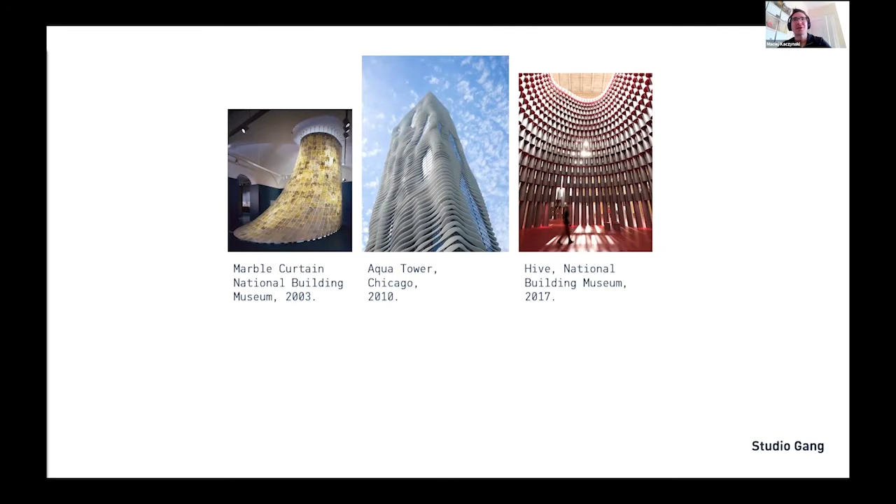Our research is a continuation of last year's ACAW. More about that in just a bit. So let me begin with a quick recap. So at Studio Gang, we work on architecture and design projects at many different scales, from prototypes to towers. And regardless of scale, a common link across these is an interest in material research and exploration. We're really keen in learning and understanding what things are made of, how materials work, how they break, how they perform, and so forth. Through material research and hands-on explorations, we hope to discover new and sometimes even forgotten ways to work with these materials.

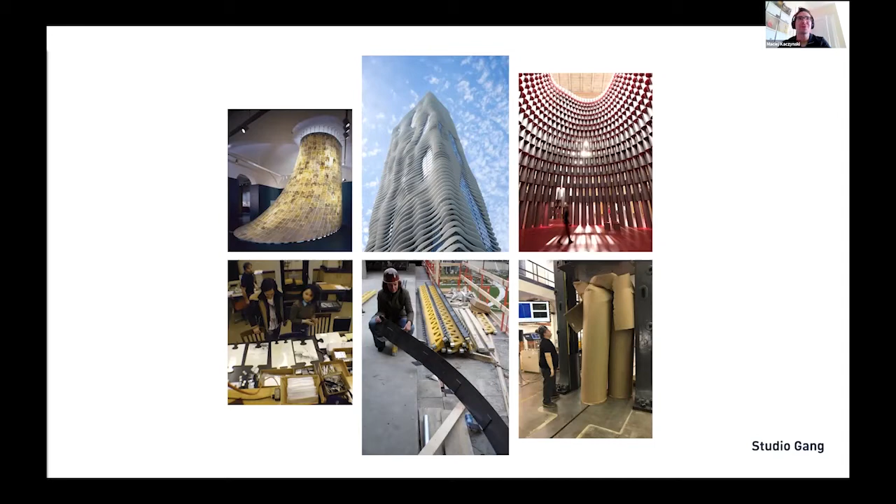Projects like ACAW are a wonderful opportunity to build relationships with and learn from material and fabrication experts. So of course, we're very thankful again to be here. We've had some experience working with terracotta as a facade material. We teamed up with Boston Valley on this project. This is Rescue Company 2, a training facility for FDNY. We were super thrilled with the collaboration and the result, but I will admit we were also astounded by the complexity and the sophistication of the clips and infrastructure hidden behind the facade necessary to hold the panels up.

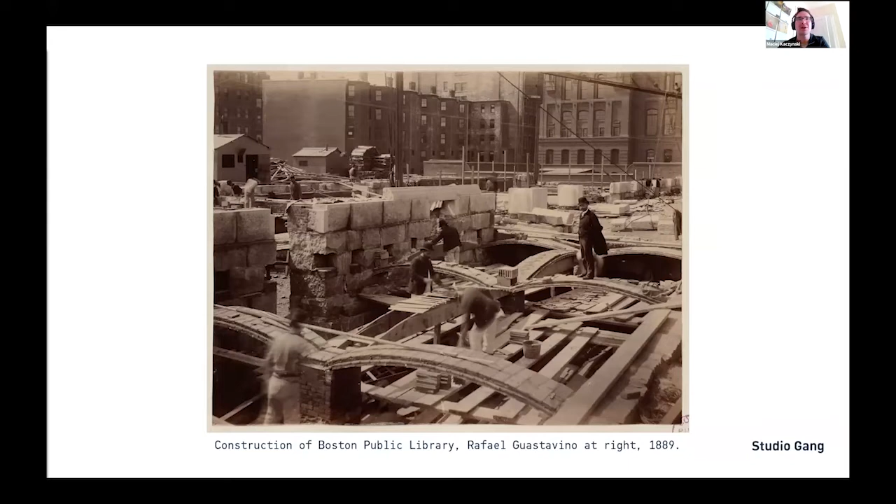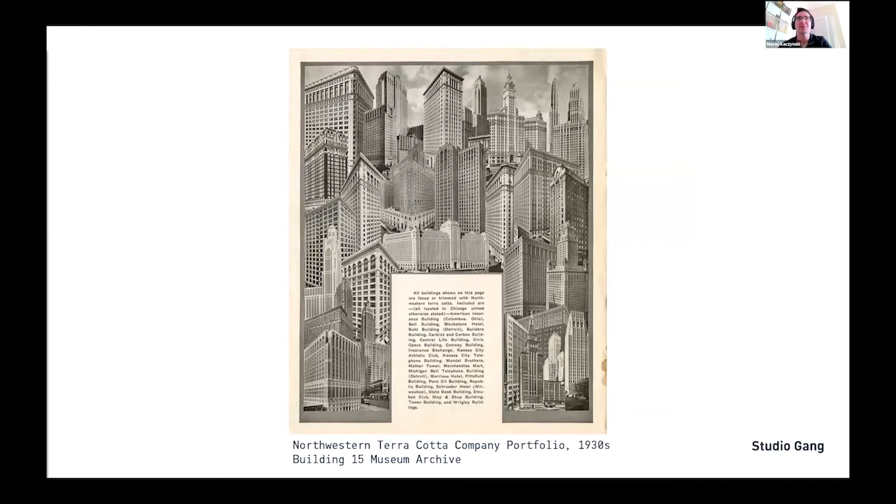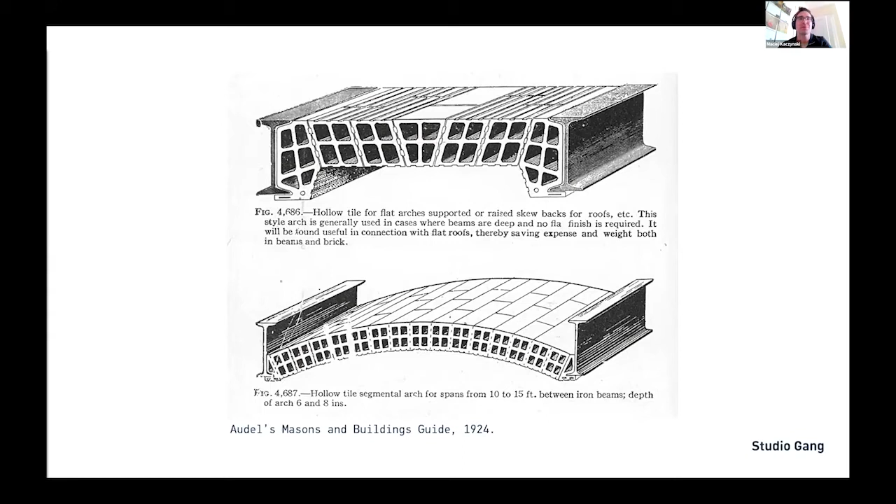ACAW presented us with the opportunity to get to know terracotta beyond the facade. And so we became really keen to learn what other applications we can find historically where terracotta has been used, in this case, structurally. We were super thrilled also to learn about the historical heyday of terracotta, and certainly Chicago played a big role in that, with a lot of civic buildings. But let's not forget that terracotta was not always, even in its heyday in the 1930s, a facade material. It did play a very important role in fireproofing and even permanent structural formwork. So this led us to our question, how can we scale up terracotta construction? And perhaps, as a side goal, how can we also reintroduce past structural applications?

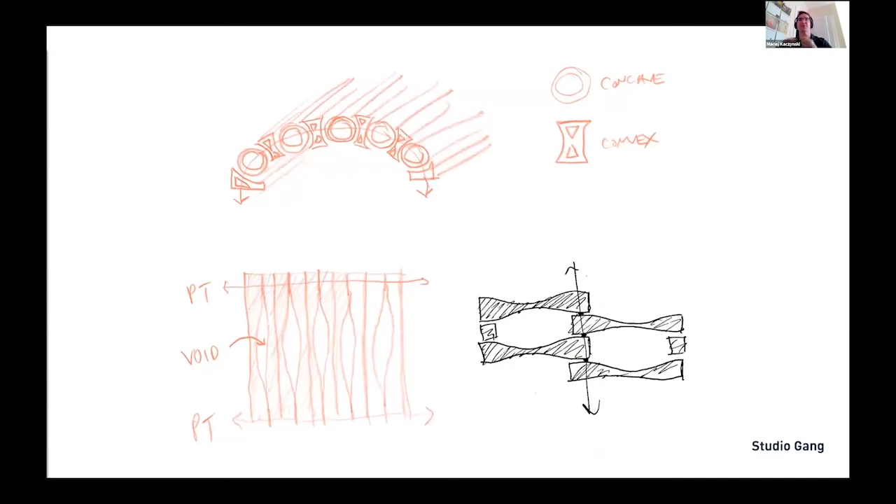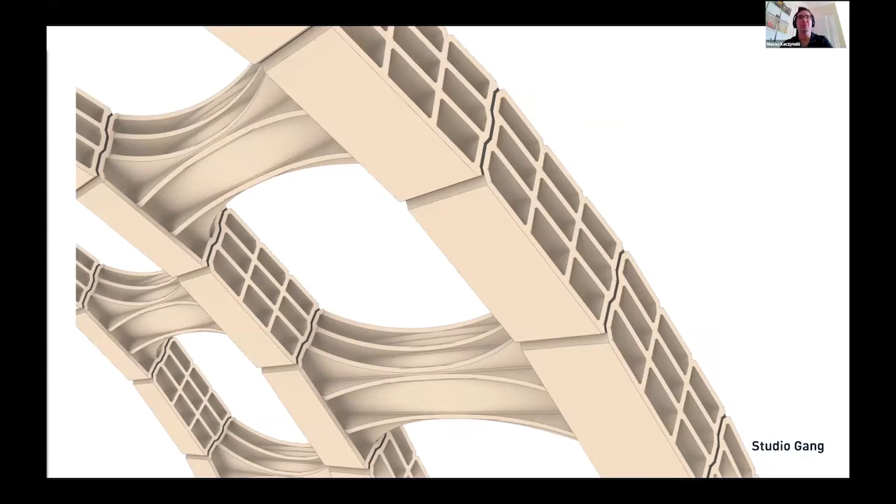Here's a super early sketch where we were trying to find some ways to begin to aggregate components. And very early on, we saw an A and a B kind of emerge, and also a desire to tension them together. So from a smaller unit that is handheld that can be fabricated into a larger assembly, like at the time, we were thinking of a monolithic mega panel of some kind. That very quickly evolved into a semicircular arch. And we were super thrilled with that. And we were immediately looking at extrusions through a die. We settled upon that fabrication method. And as we began to refine the shape, going from a semicircular form to a more structurally idealized form, we were also interested in carving operations to remove excess material. So only put what's there.

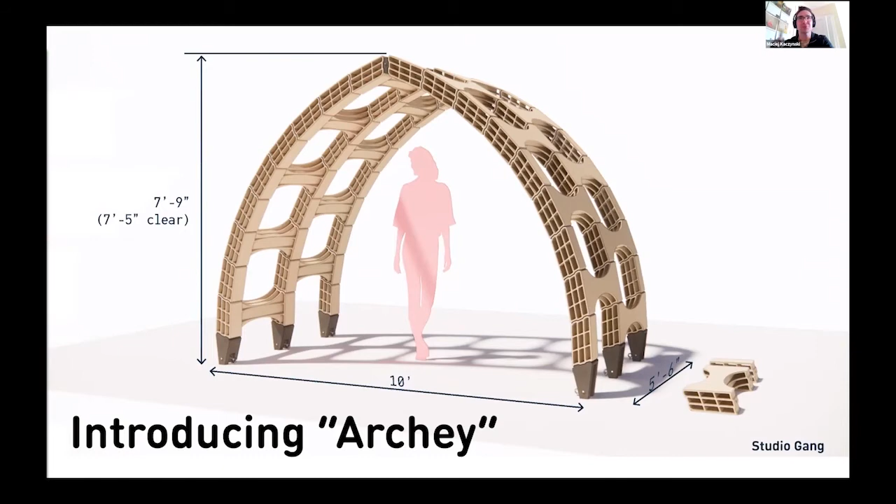Here's the arch that we settled upon. This is from a year ago, fondly named Archey. It remained true to that form. It has some subtle changes, which we'll review in just a second, but this is a recap of where we were at the end of last year's ACAW. We did do a virtual exhibition. It was the era of COVID, and so everything was entirely virtual. And here you see the exhibition that showed off the actual assembly of the arch, the steps involved in that.

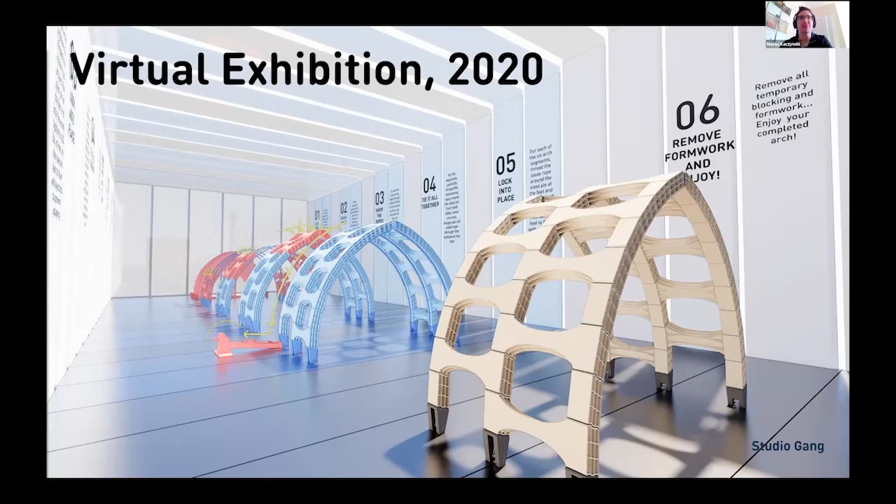It's easy to build an arch virtually. It's not quite the same in real life, starting with the extrusion. So this is a look at one of the extrusions. And if you were to look casually, it appears conceptually obvious, right? Clay plus pressure plus die equals extrusion, but in reality, there's an extraordinary amount of craft and care and consideration that goes into every success. It's not something to be taken for granted at all.

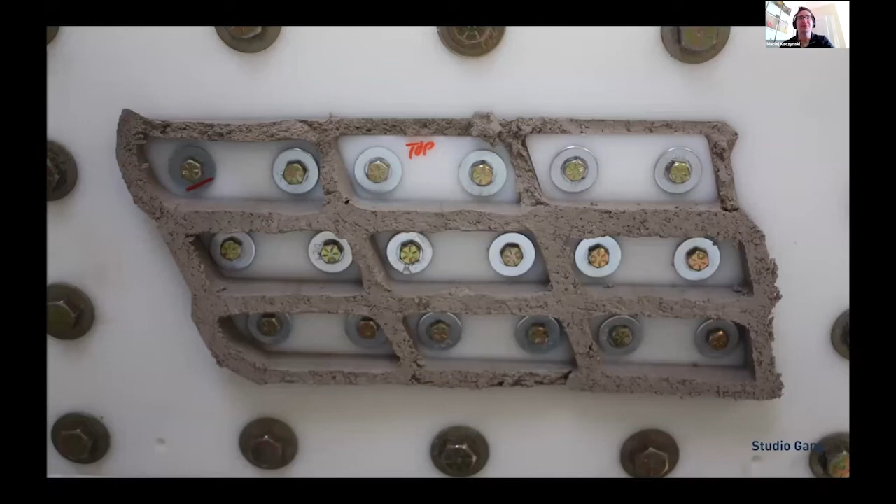Matter Factory did have some difficulty producing this, and we learned a lot through them and with them, as much as we could virtually. At the end of the project last year, Boston Valley Terracotta very generously offered to take on this extrusion and invited us back to continue the line of research. They sharpened their pencils, remade the die, and tamed the extrusion, which was super great. And we, of course, as one does, found more problems that we had to solve. They said to us that it's not quite working. We're getting a little bit of a sagging issue as the pieces are coming out.

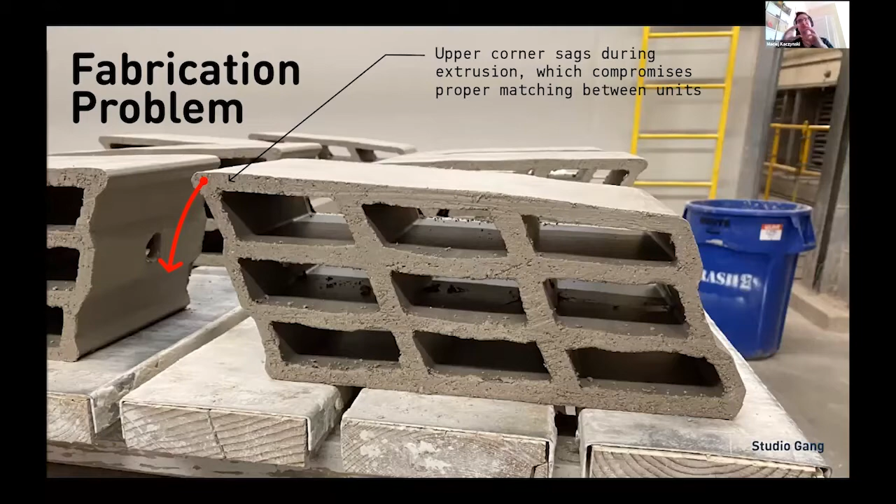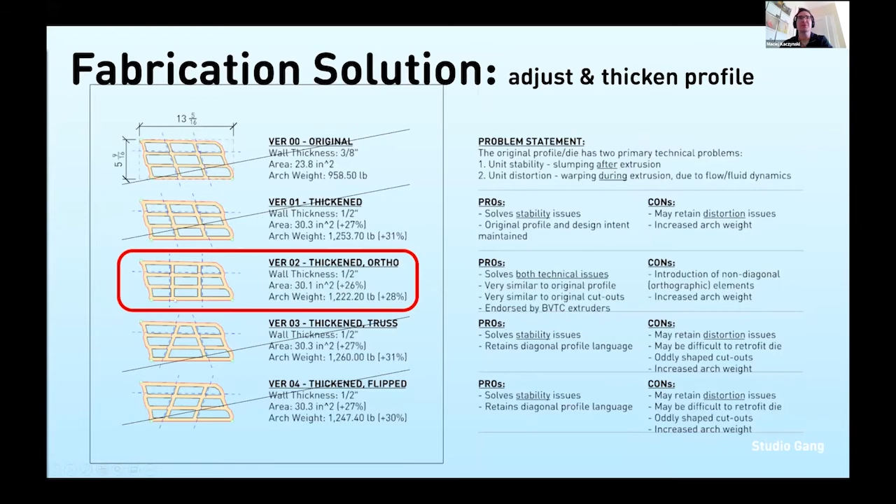And having some kind of fidelity for the unit was super important to us because, of course, even just a subtle change writ large could compound and make a very different arch. So we went back to the drawing board and worked with Boston Valley Terracotta very closely. And we investigated several options and settled upon a version that was both thickened, the actual profile itself was thickened, and also we reoriented some of these cells inside of the extrusion.

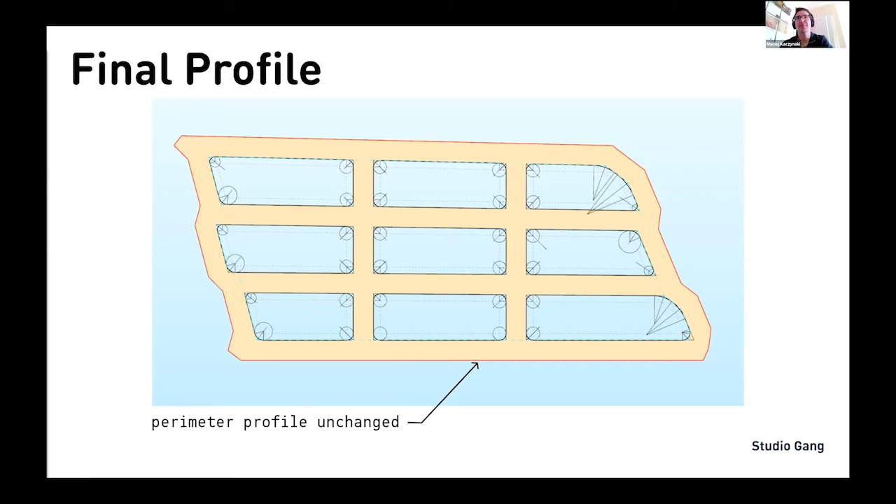This gave us our final piece. If you're looking at it on a monitor like I am, that's about the real size of it. And importantly, the perimeter profile remained unchanged despite what was happening on the interior of that. Here's a view of the wire cutting operation and also the final finished piece. So after about a year plus of steady troubleshooting, we had pieces ready for the kiln.

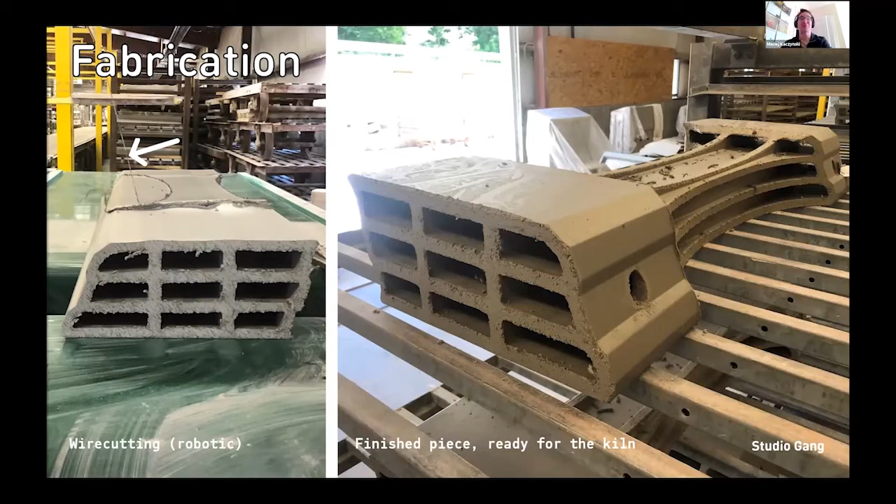And over the course of our collaboration, as you just saw, we were making subtle adjustments and changes to the arch. And one that's also worth mentioning is that through that process of troubleshooting with Boston Valley, we began to have less confidence in our original joint connection between these blocks and decided that rather than the originally intended 1/4 inch neoprene gasket, which was always a little bit ambitious in terms of its ability to handle variation, we decided to go with mortar joints. More on that later.

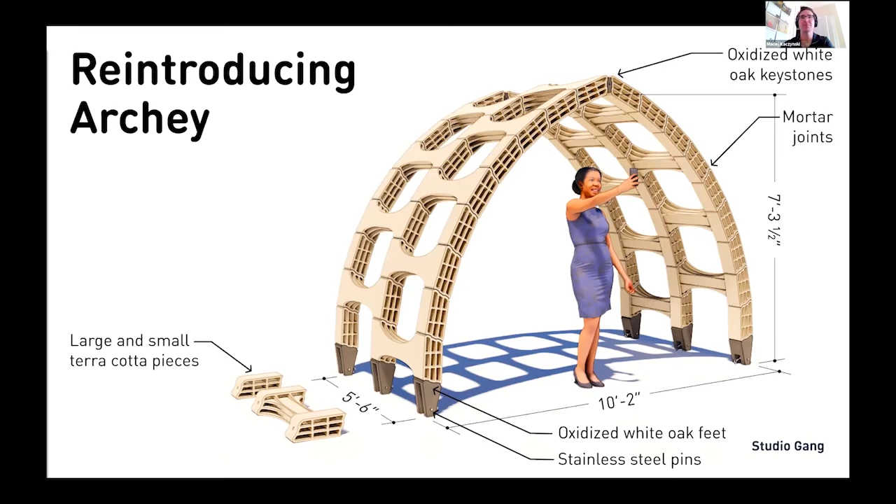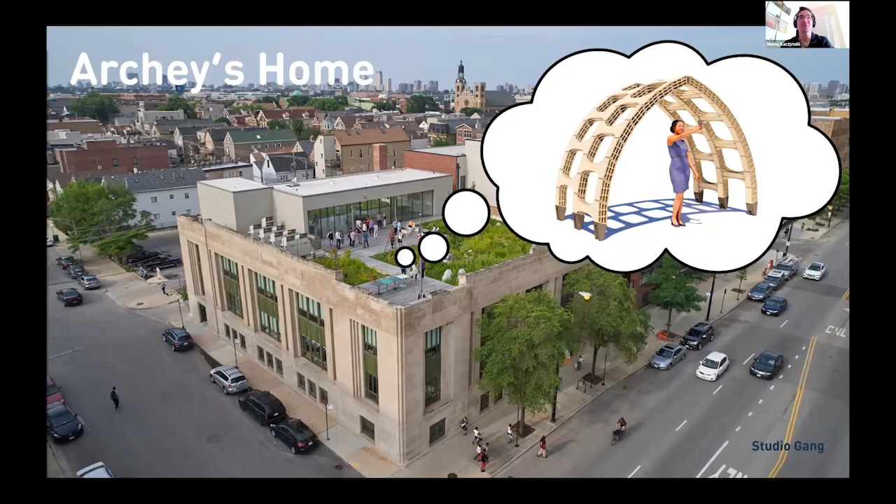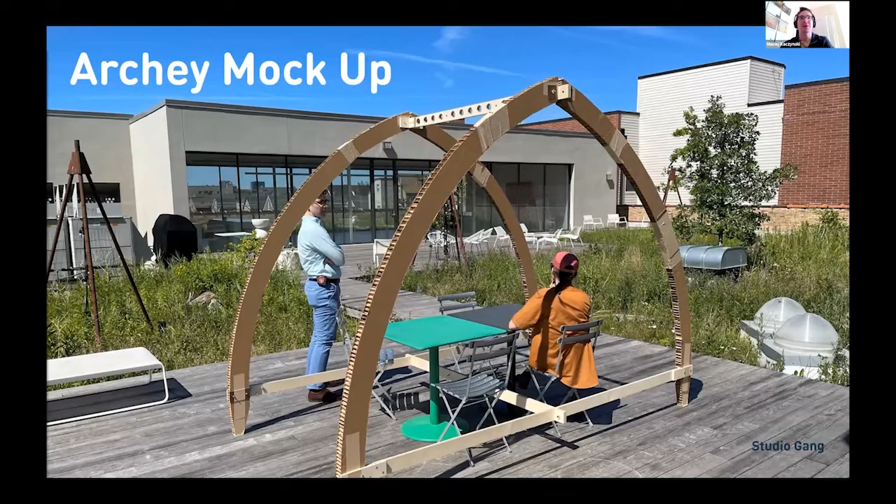So now that we had the terracotta in production, we could shift our attention back to the rooftop here at our Chicago office, where we always had intended to build Archey. We were super diligent about finding the perfect location on the roof to make the perfect home for Archey, and made a mock-up to shift around and relocate across the roof, settled upon a location, and then quickly turned our attention to the base design.

So we got real about the base pretty quickly, and what we realized is that there was actually quite a good reason to be using the deck, not just as a site, but also structurally. So if you look at that slightly different shade of decking beneath the arch, that's actually new decking that we use as continuous boards to actually provide some resistance to splaying.

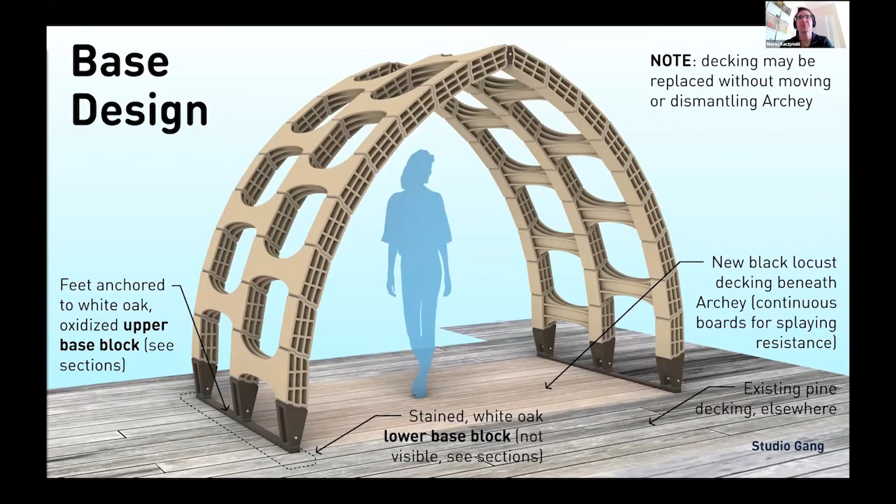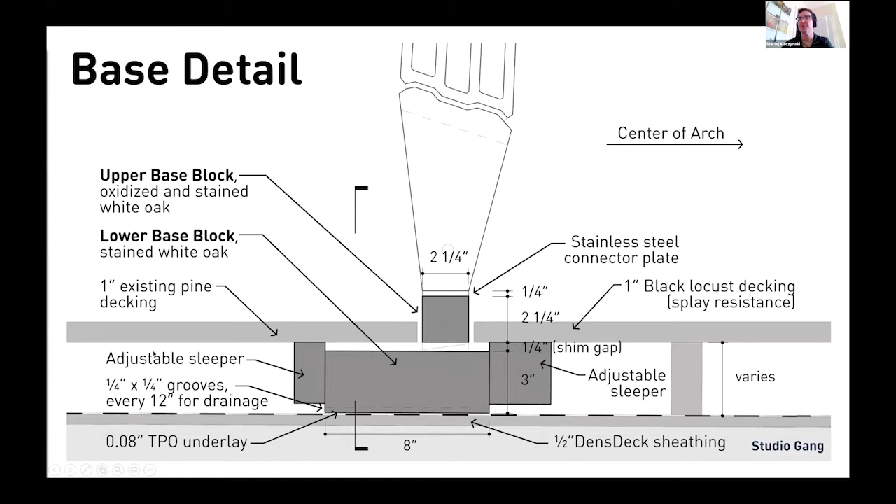If we look at the section of that, you can of course see those boards that run continuously. And then if we zoom in toward the actual foot, you can see the large blocks that make up the feet that you can't see at all. And then these sort of quote unquote finished blocks up top. And here's a quick view looking at it from the side. You can see all the hardware.

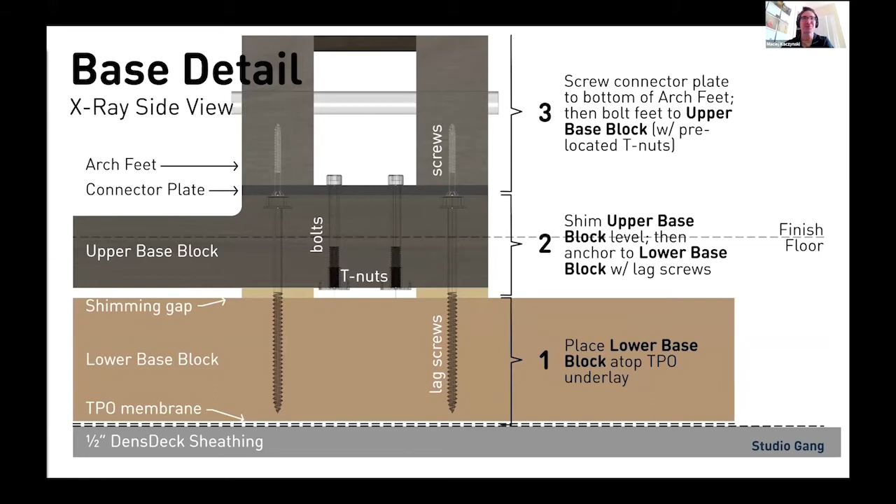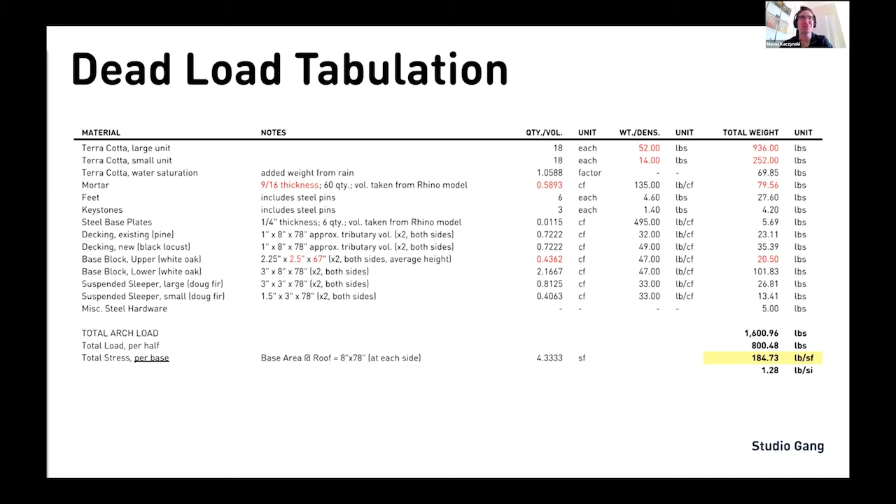So as we were designing the base, we were, of course, in very close contact with our friends at Walter P. Moore. It's natural to assume that a 1,600-pound terracotta arch would have no need to resist uplift. But when we provided those dead loads to Walter P. Moore, they informed us that actually there could still be some very windy conditions in a very windy city where Archey might actually drift slightly, pulling our deck with it. So not airborne we're talking, but still not behaving quite the way we wanted it to. So that was a really important moment.

Actually, we sort of sharpened our pencils, and we were sort of later in the process too, frankly. And we really didn't want to be adding a lot of ballast. We certainly couldn't add it to the terracotta at that point. So we said, okay, there's enough deck here that it feels like we can do something with it. We can take more advantage of that. So we actually began to just have a more thorough connection, which was really just a few confidently secure members, additional sleepers, if you will, integrating it into the deck.

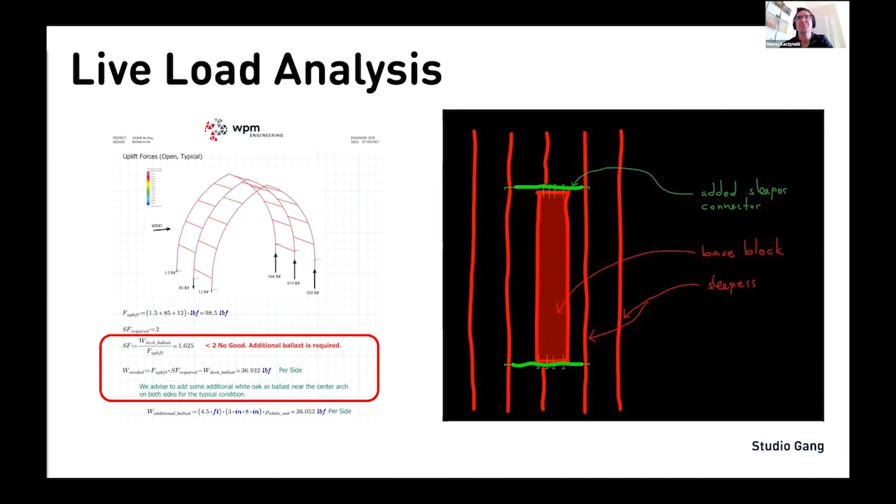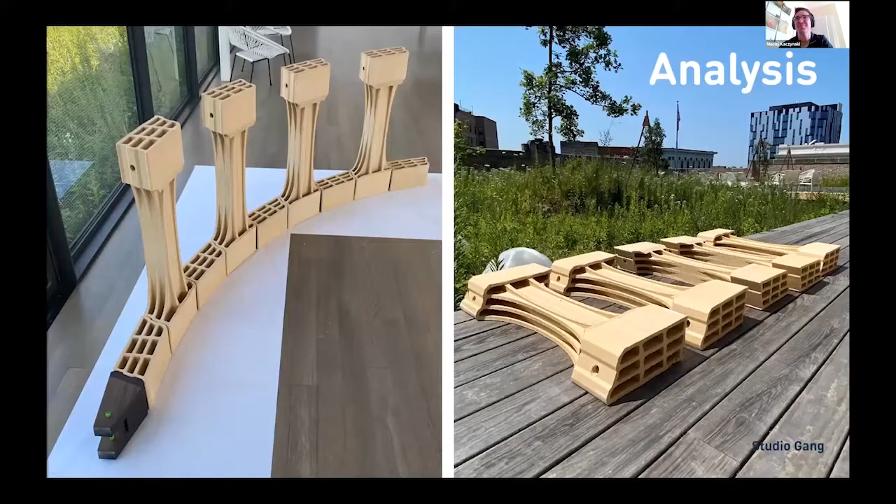Delivery day arrived. This was one of the first moments, aside from just a smaller scale test, that we actually got to handle the material. It was a very exciting moment. We were also, I will admit, astounded by the scale of the pieces. They're always smaller in a computer in front of you. So we were super excited, and we placed the blocks out onto a full-scale print, and we wanted to confirm the joint gap immediately, because that would let us, of course, proceed with the construction of the falsework.

So we carefully measured and labeled all the blocks. They're all identical, but we knew that we'd have some natural variation in them. And sure enough, we did find some pieces. We had extras. So we did find some pieces that we could set aside and not use. They probably visually even looked identical, but even just some slight measurement tweaks led us to put those aside and probably keep them as emergency spares.

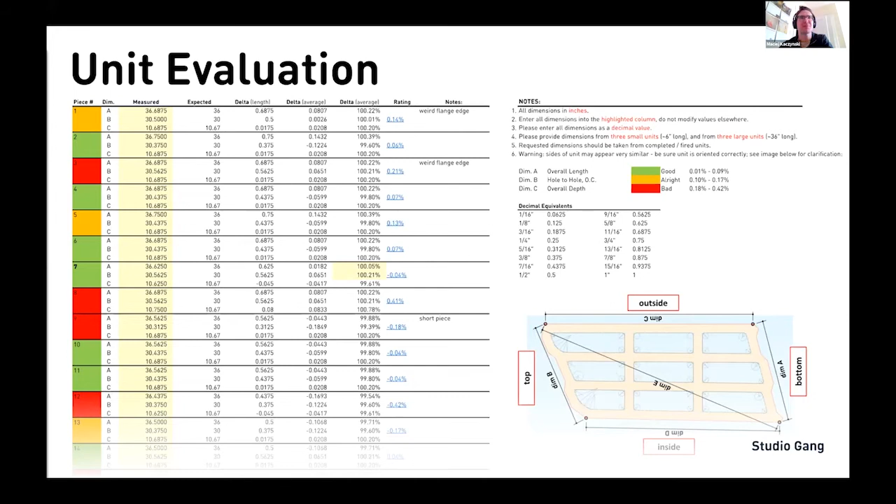So Archie is essentially 3 projects in one. It's the base, which you barely see, which we reviewed already. It's the falsework, which is temporary, and of course the terracotta itself. Each of which has its own special considerations, and building upon our roof required very careful attention to those existing conditions.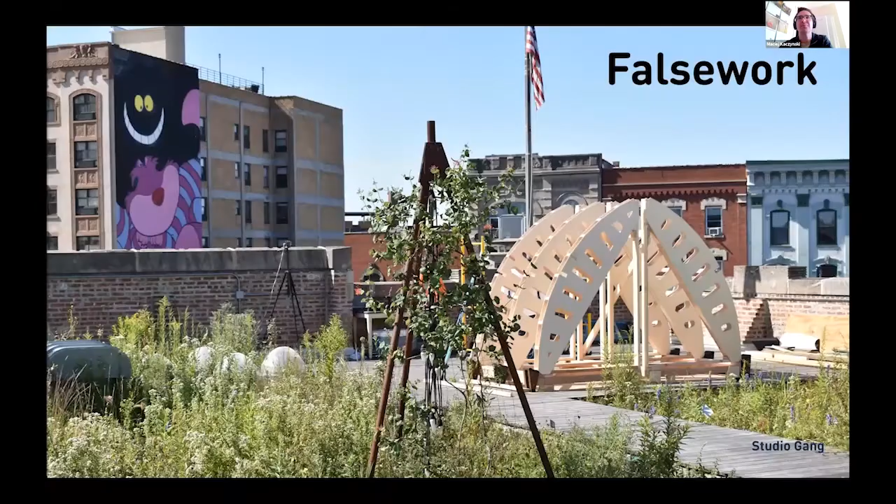So the falsework wasn't as instant as this presentation makes it appear. It was itself a considerable undertaking. It's a simple, though dimensionally demanding construction. So one very important ingredient of that is the shimming detail. And that's super important because we do need to place it very accurately in 3D space and have it sit very confidently so that we're not having any difficulties with doing the stacking.

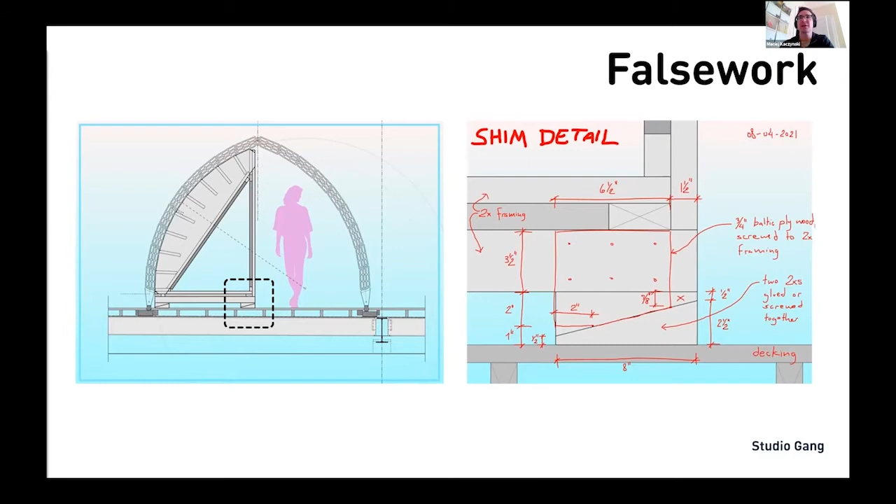Here's a quick look at, you might recognize this. This was taken from our virtual exhibit from last year. It was also a handy reference. We could pull this up when we scratched our heads from a year ago and say, how did we intend to do that exactly? And we could remind ourselves. And so this gives you a sense, it's fairly straightforward.

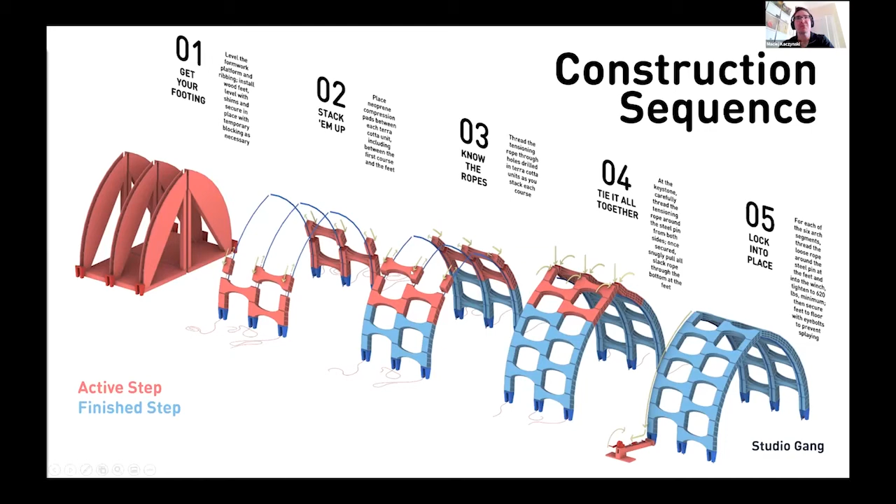You have centering, you place the blocks on top, but one important ingredient to produce that sort of monolithic post-tension construction is, of course, the actual tensile line. And you can see in here that tensile line is being pulled through the blocks as each one is being placed very carefully. Visible at the right there is that pilot line.

So here's the very, very first block that we set up. So keep an eye on some of these photos that you'll see during construction, because that is a super important thing. I don't think we once lost it, but it was a bit of a nuisance to just continually fish through the blocks, though the payoff would be very good in the future. You'll see that in a bit.

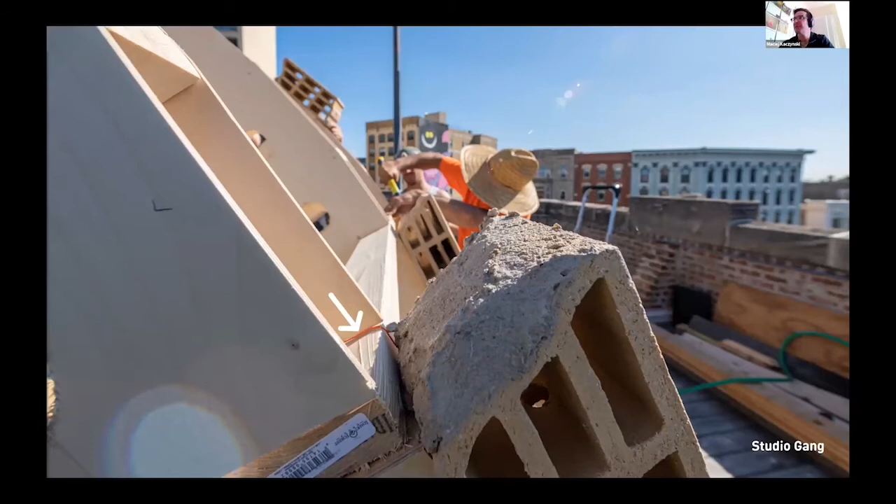Here you can see that line again, and it's worth mentioning here that we actually had several joint designs and materials. I spoke a bit about this briefly earlier, but we ultimately found the most fitting material is also the most ancient, which is lime mortar. This gave us a couple of properties that we really liked. One was the ability to accommodate variations in the terracotta blocks themselves, to provide a long set time.

This was important to maintain some level of plasticity for the tensioning process at the end. So we couldn't have all the mortar set up entirely. We wanted to give it a little bit of squish. And then also this lime mortar gave us confident adhesion, so that even as these pieces ascended to vertical, we didn't have to worry about it moving on us.

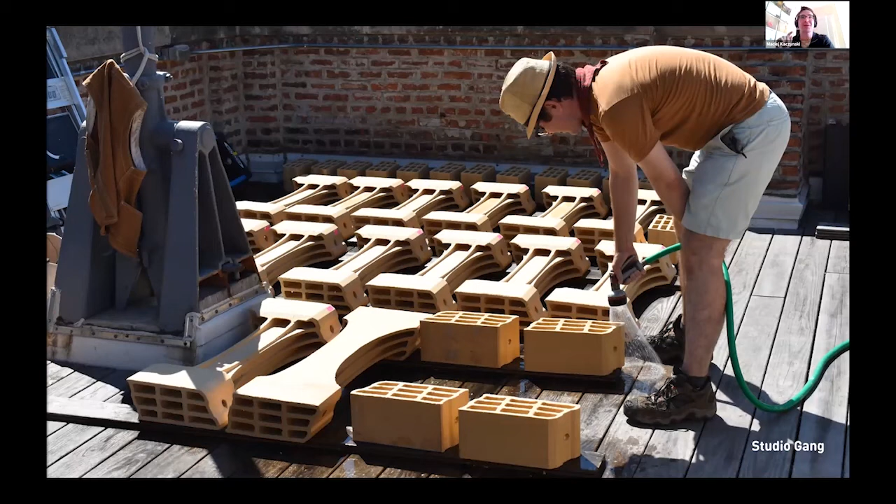During prototyping, we also found that despite lime mortar's long cure time, a very dry block will also make it cure much faster than you were expecting. So it was super important that we also just wet these down constantly, which was a constant task that we couldn't lose sight of on a very hot day.

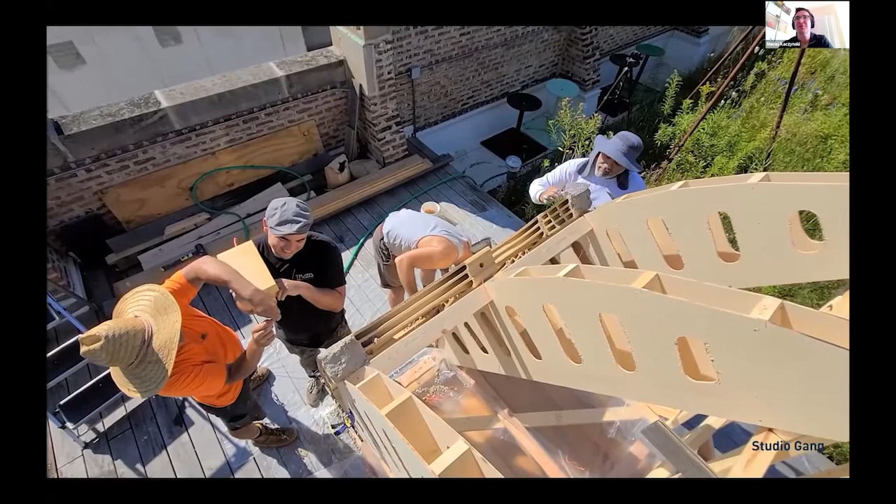Here are several important and simultaneous steps happening. You can see Skylar and Juan on the left here, fishing that pilot line through the block and setting it in place. No less important is Evan's job in the middle there, keeping those holes clear of any extra mortar. Obviously, we can't pull that line through if it's not clean and clear. And Carlos on the right is laying the mortar up for the very next course. We were initially quite slow, but gained confidence as we moved up, literally.

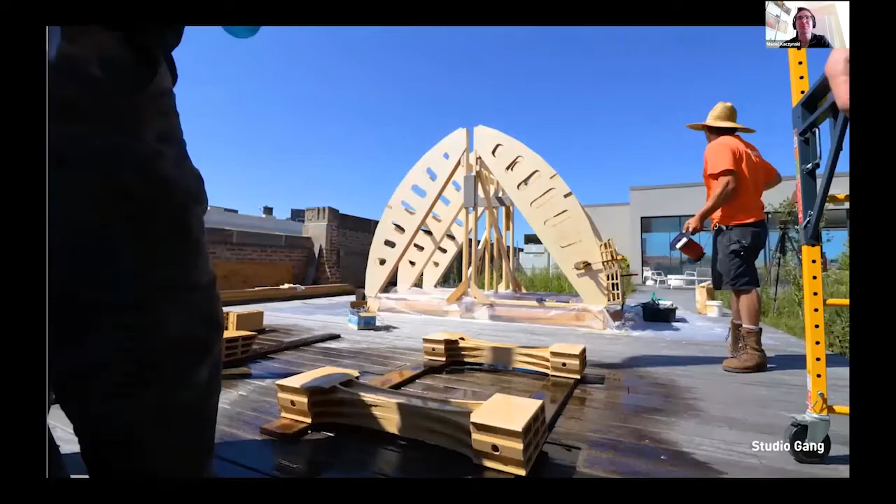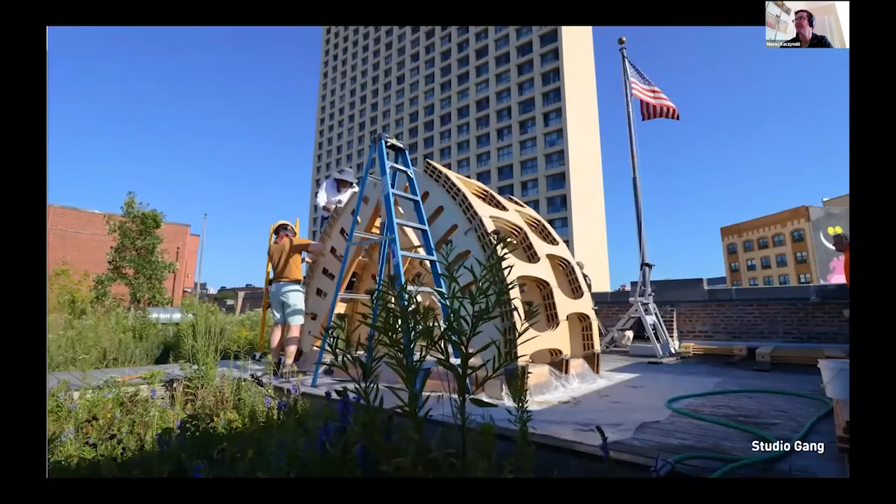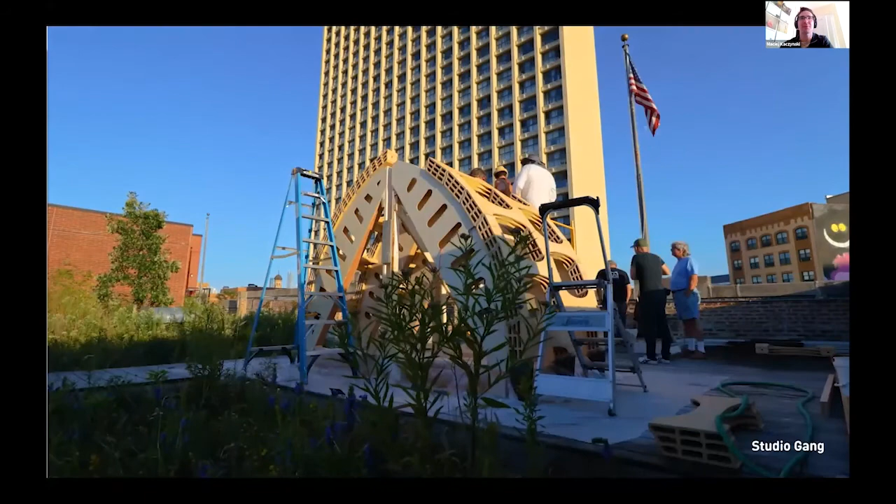And right about here is where we began to lose steam a little bit, but we knew that we had to get all the pieces in place that day so that we had a little bit of control about the tensioning process the next day. So day one, set all the pieces. Day two, actually do the tensioning.

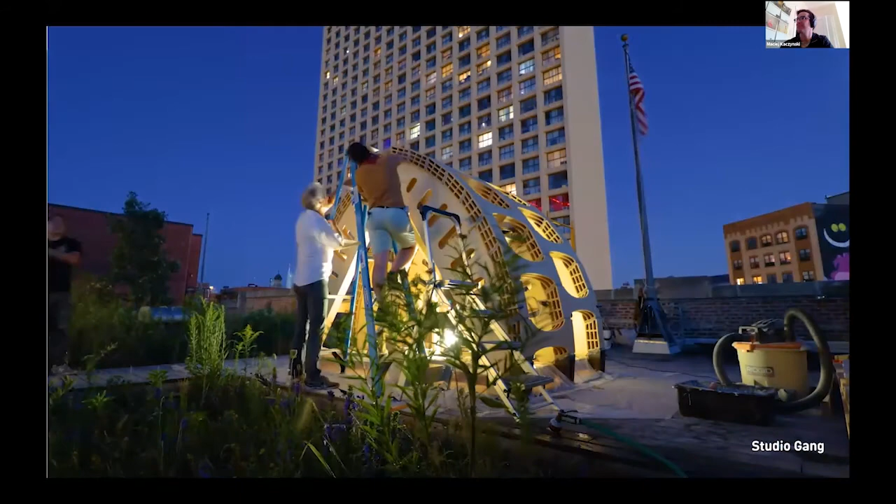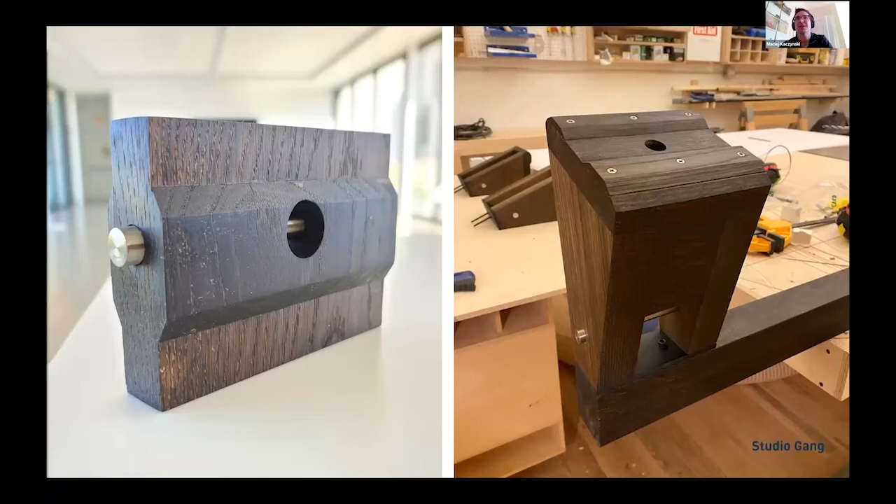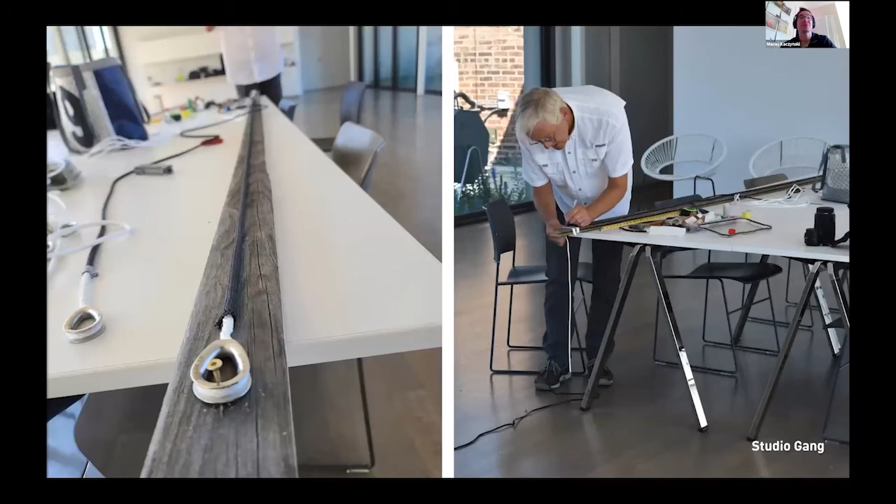It might look like a completed arch, but no, that's forgetting one of the most exciting parts, that's the tensioning. And really, ultimately, tensioning is just an operation to link these two objects: the keystone at the top and the feet at the bottom. And connecting those two together is Dyneema rope. It's an extraordinarily durable material. It's resistant to loosening. It's stretch resistant. It was sort of a perfect fit.

Here you can see Peter, our knot whisperer extraordinaire, splicing those ropes onto the keystones. Also note the black cover, which you should be able to see here around the white structural tendon. The black cover was there to protect the actual structural member. And there is good reason to do that because terracotta can also be sharp if you've handled it.

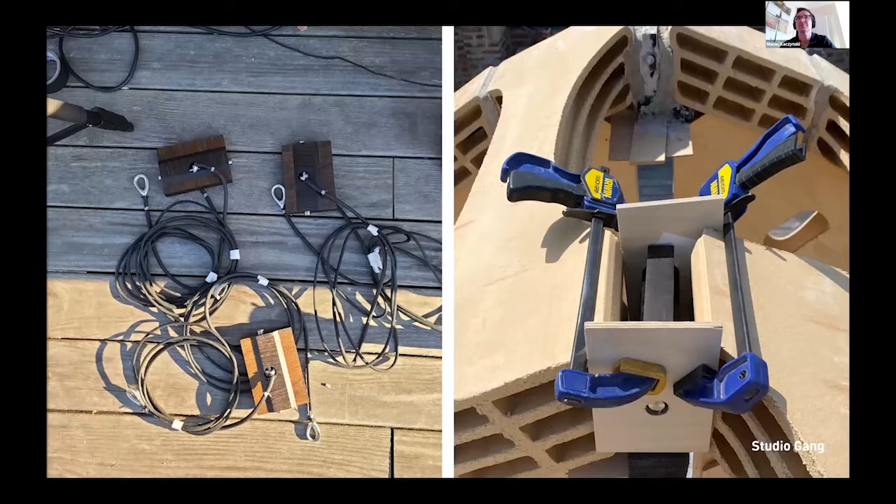Here's a view of those tendons spliced around the three keystones and a view of the keystone in place on the right. Note the unmortared gap. Now that gap there was quite important actually. So what we did was we placed these keystones with the tensile lines attached to that orange pilot line and pulled the entire thing down through toward the feet. So then we didn't have any pilot line, we just had the actual tendons in the arch, 6 of them in total.

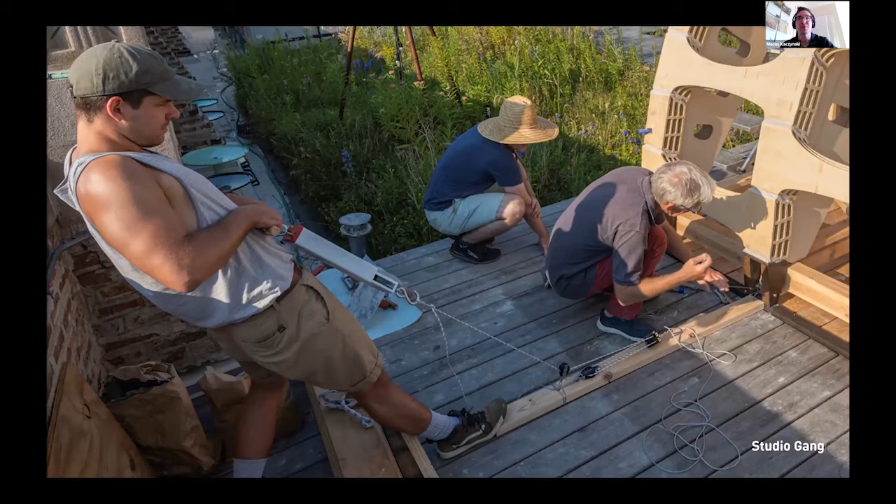Once we had the tendons pulled down through the arches, we could then post tension them securely to the feet. So this happens with 2 lines, one that is temporary, that is applying the actual necessary force downward, and then another line that is actually linking those 2 together permanently.

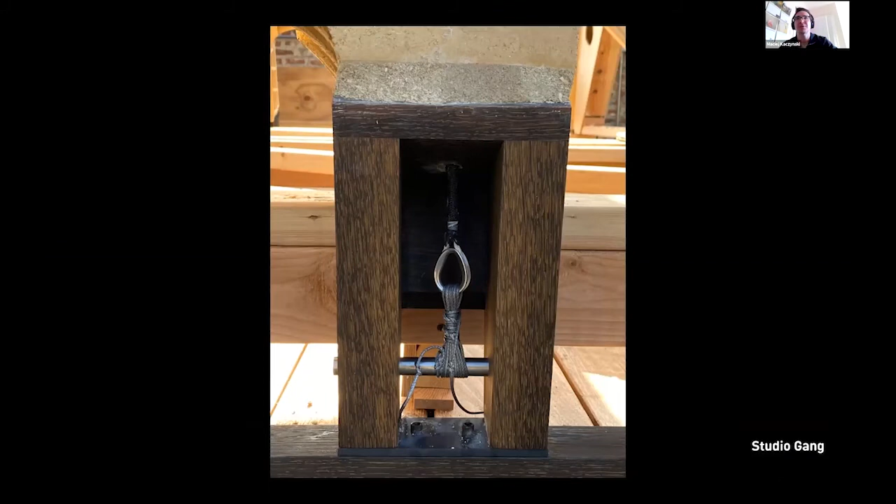If you're looking very carefully, you may have noticed that in an earlier version of this, our tensioning operation happened with a winch. We realized that we didn't need a winch to do the tensioning. With some clever rigging, even puny Evan here could do the necessary tensioning operation. Here's a look inside the feet showing the permanent line. You don't see the temporary pulling line here, just the permanent line.

So despite all that was 2020, we were thrilled to finally bring Archie home on the range, so to speak, on our rooftop. And we're also super excited to imagine the critters and birds and lichen and moss, et cetera, that we think are going to call Archie home in the future. You might be wondering, but wait, Maciej, when are you going to remove the falsework? Is this a cliffhanger? It is a cliffhanger. Archie sits on our roof just like that at this moment.

And on Monday, we decided that we were going to remove the formwork. And I'm sorry to disappoint you, but you'll just have to write us and ask us how Archie went. Or better yet, as we move past our COVID era, come and visit. Our rooftop is a semi-public space. We do host events there. So you can see Archie yourself in the future.